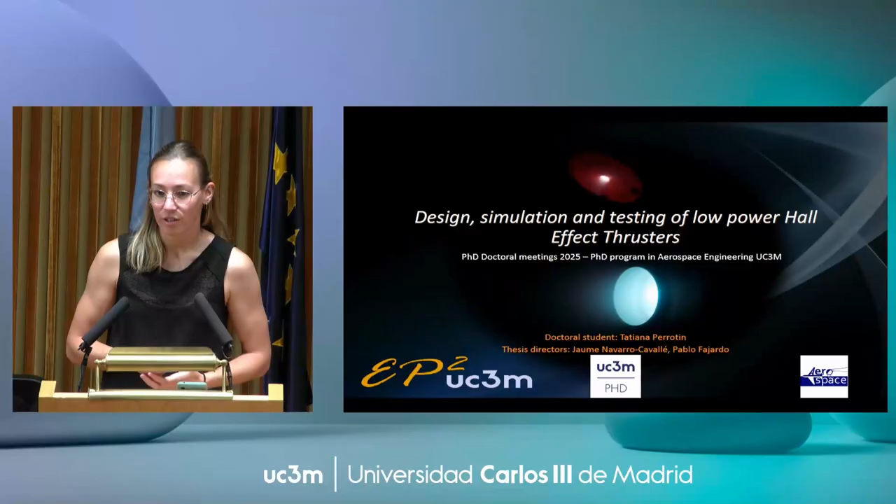I'm Tatiana Perrotin, and I'm going to talk about my work on the design, simulation, and testing of low-power cylindrical Hall thrusters in the plasma propulsion group.

For those who don't know, annular Hall thrusters are the traditional type of Hall thrusters, and they are one of the most mature and common in space electropropulsion technologies. They are pretty popular for their high performance, specifically their high thrust. But most of the existing ones are high power or medium power ones. And now with small satellites being more and more used, we need to develop low power propulsion solutions.

And this is challenging because we don't know scaling laws, and efficiencies drop as we decrease the size and the power of the thruster, along with other engineering problems that arise. And the cylindrical Hall thruster is a rather good candidate for low power because we remove the internal pole, so we remove opportunities for wall losses. Some other aspects are also a bit easier.

It's not conventional, and there are a few prototypes that exist. So there is room for research on those kinds of thrusters, and we need experimental data to improve our capability to model those thrusters and to optimize them, and better understand the physics, of course.

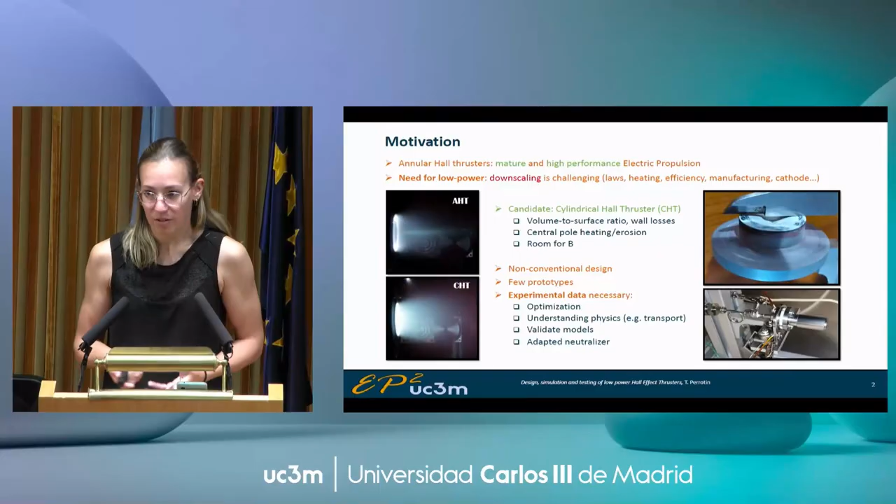So the main objectives of my thesis are centered around optimizing the performance of the cylindrical Hall thruster at low power. For this, I designed two prototypes and made them sort of modular to be able to test different magnetic fields or injectors, these kinds of things. And I characterized their performance and their plasma properties.

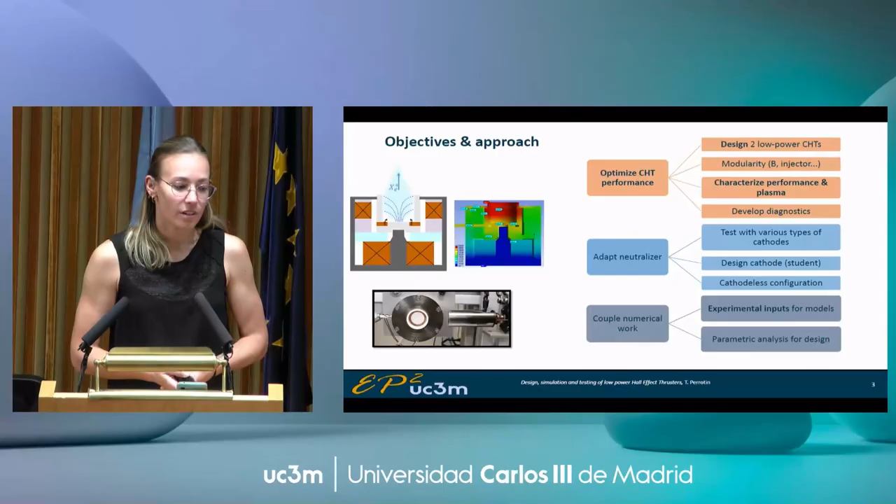Some work also focused on the neutralizer, the electron source that goes with the thruster, and on coupling numerical work, specifically providing experimental inputs for simulations. At the beginning of my PhD, I did some simulations with the hybrid code of the group, HYPHEN. And more recently, I've provided a set of experimental data for Iñaki, who presented his thesis yesterday, to run new experimentally informed simulations with this code.

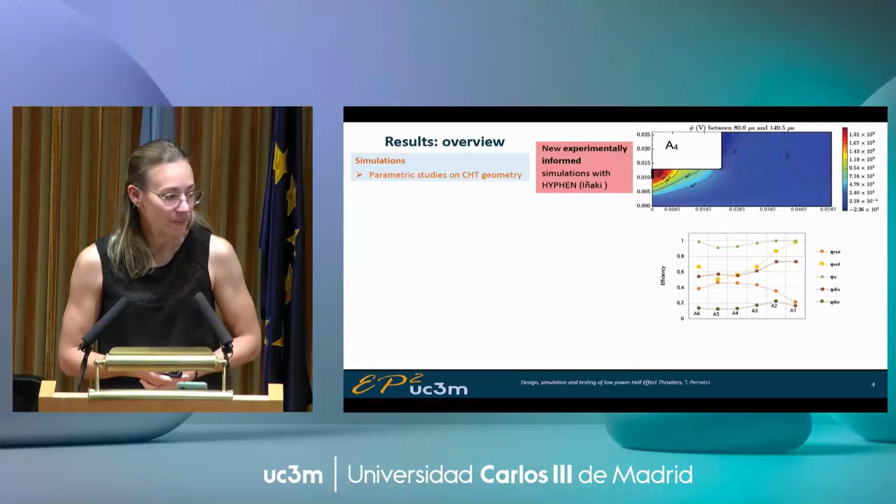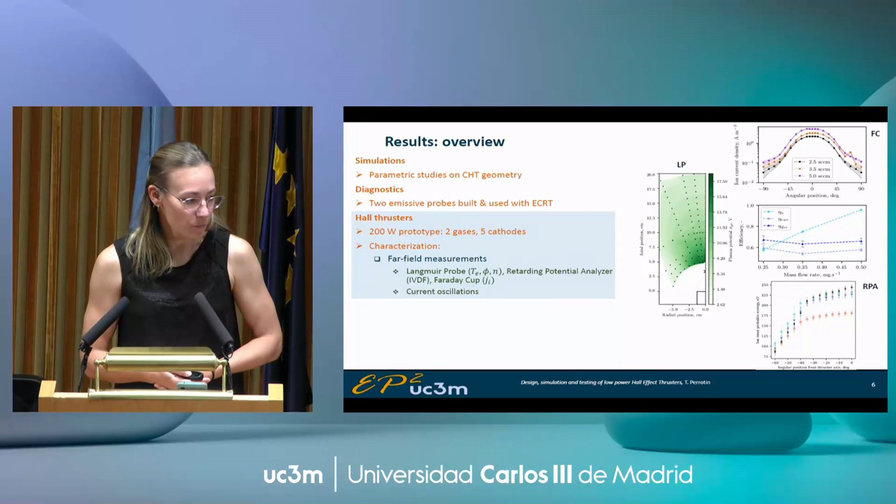In the second campaign, I looked instead inside of the discharge channel with laser-induced fluorescence spectroscopy to measure the ion and atom velocity distribution in the channel, which is something very useful both to understand the geometry of the plasma inside of the thruster and to inform models.

And the latest test campaigns I have done were focused on measuring directly the performance of the thruster using a thrust balance that we have here in the lab, and that you can see in the two pictures above, and to complement those direct measurements with probe measurements.

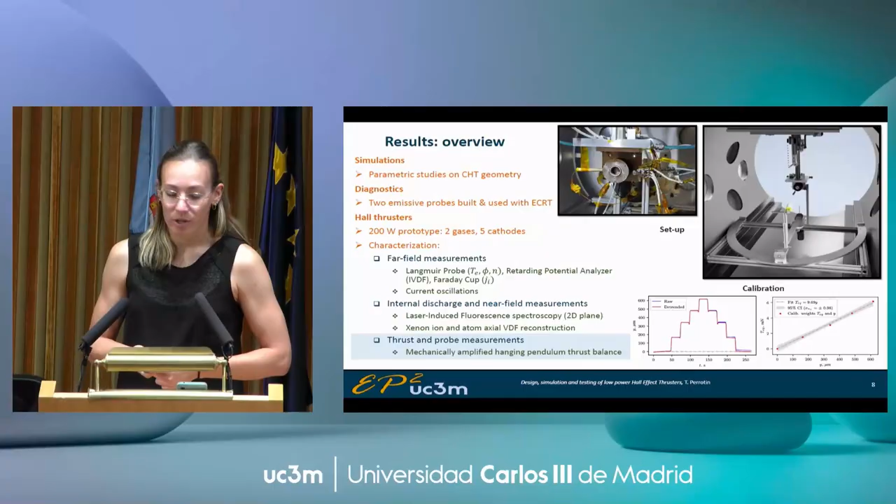So the main takeaways from those two campaigns gathered in one are that, first, we had to develop a specific procedure to measure the thrust, to isolate the real thrust from the actual displacement on the thrust balance and other external effects, which is not necessarily easy with this type of thruster.

We observed, as you can see on the top right plot, the expected behavior that the thrust increases with the mass flow rate and the discharge voltage in the envelope that we could cover. And we saw that the thrust efficiency mostly depends on the discharge voltage, that is on the bottom plot. And we reached the maximum for 325 watts, which is a bit more than the expected nominal power for the thruster. And the thrust efficiency saturates in the range of power that we covered.

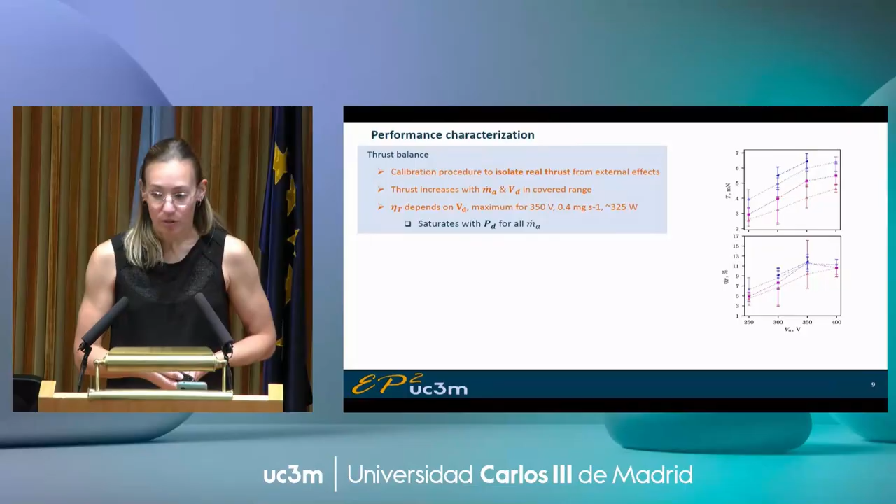As I said, to complement the thrust measurements, we did some probe measurements that give a bit more detail on the sources of losses in this thruster. So the first probe that we used was a Faraday cup that measures the ion current density in the plume. You can see a matrix of various operating conditions, so mass flow rate and voltage. And for each of these points, we did several angular scans of the plume.

And we see quite obviously on those plots that there is some asymmetry in the plume that can be caused by the cathode location, the injector inhomogeneities, the position of the coils, and some misalignments of the probe. So we have a rather clear idea of why we have these asymmetries.

And from those measurements, we saw mostly that we have a propellant utilization that is large, in some cases larger than 1, which is something typically observed in this kind of thruster, which is possible in the way it's computed in this case, and is characteristic of the possible presence of multiply charged ions. And we also observed that the divergence and the current utilization are quite low, and they're strongly affected by the discharge voltage.

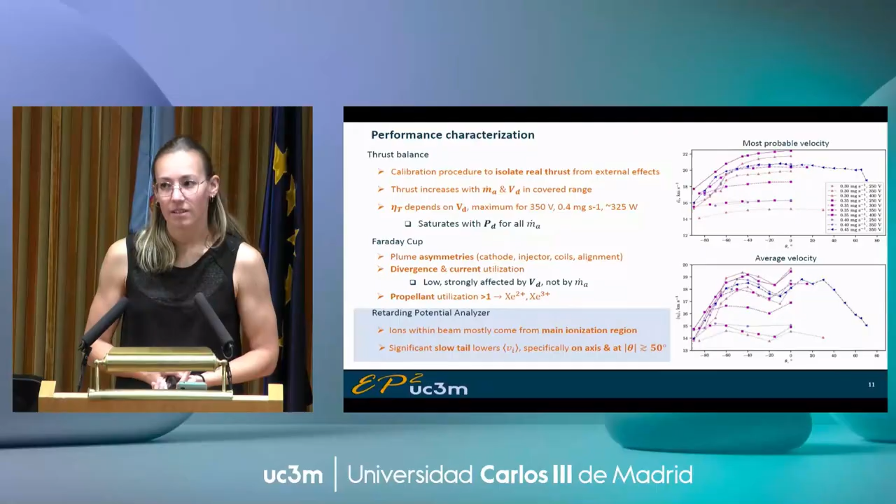Mostly we saw from the top plot that the ions within the beam come from a single main ionization region, with the sharp drop at wide angle. And from the bottom plot, we can see that on the axis and at wide angles, the slower ions that form the tail of the VDF significantly lower the average and affect the performance.

Combining the data from those two probes, we can evaluate indirectly the performance of the thruster, and we saw that there is quite good agreement with the direct measurements, which confirms that despite all the assumptions and the measurement errors, we can still rely on the information provided by the probes.

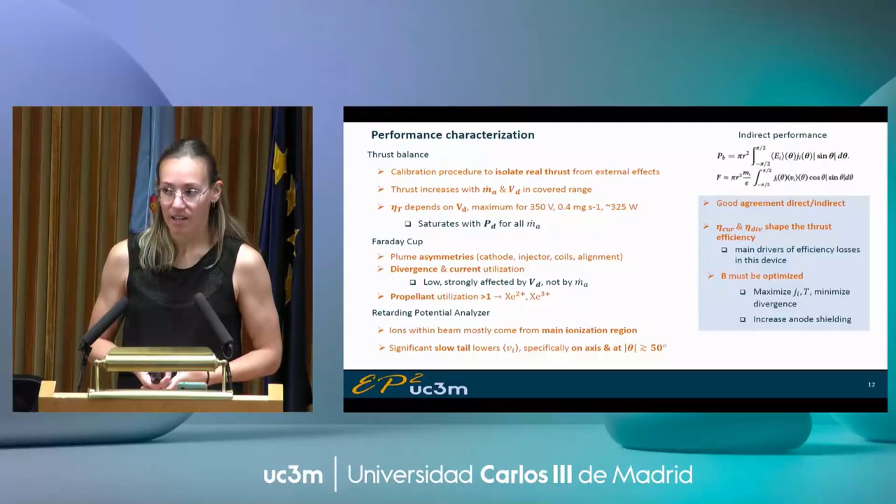As a conclusion of this campaign, we saw that the current utilization and the divergence are the main drivers for the losses in this device and are the ones that shape the evolution of the thrust efficiency. And they allow us to identify what must be optimized in the thruster, which is the magnetic topology. The objective for future iterations would be to increase the anode shielding, to have less electron current towards the anode, and maximize the ion current in the beam and the thrust.

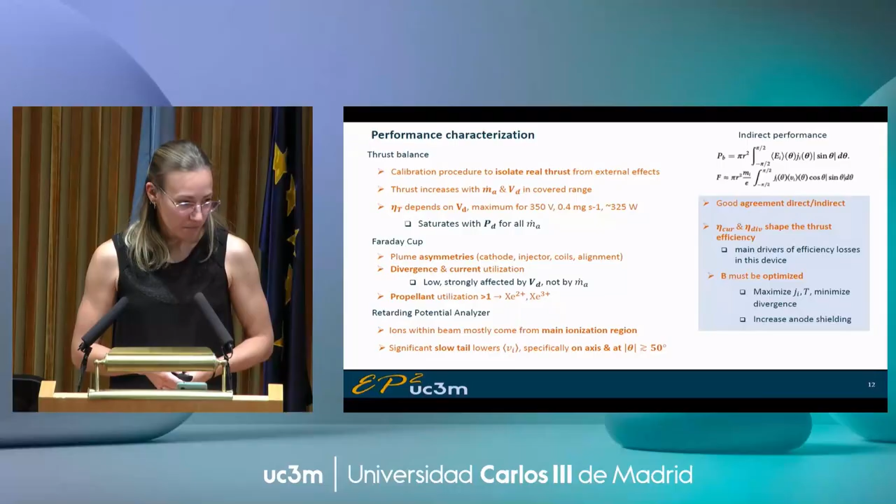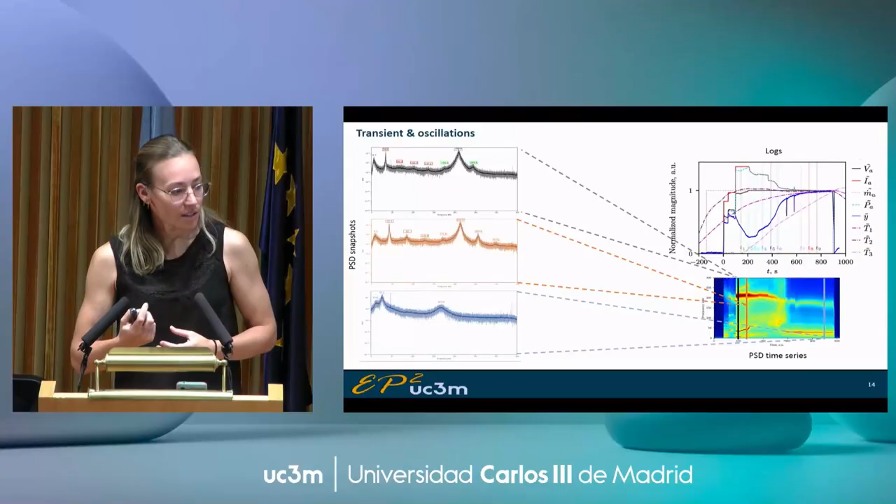This shows the evolution, as I said, of the high current. So on the top plot, you can see the high current mode with a very strong high frequency oscillation that then shifts towards a lower current mode in steady state with lower frequency oscillation.

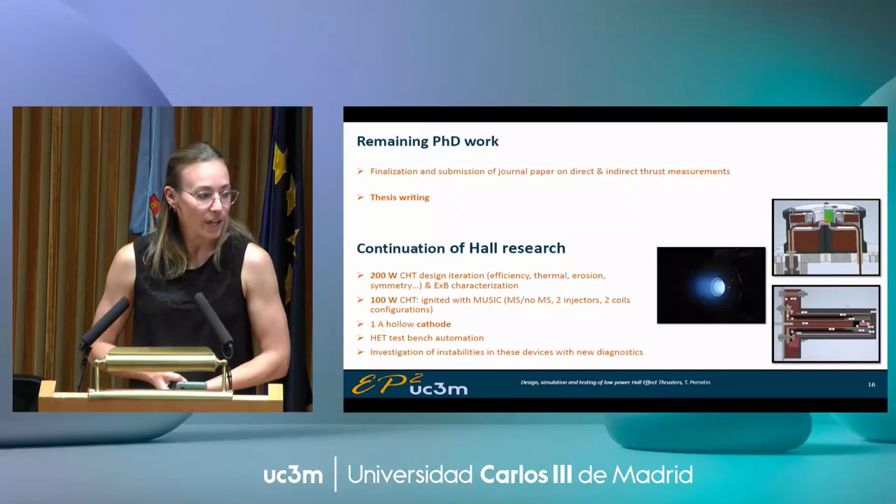To conclude, what I have left to do in my PhD is to conclude a journal paper that I am writing right now and to write the thesis. A potential continuation for the research on Hall thrusters in our lab would be iteration of the design of the thruster I tested, whose results are presented today, further testing the new 100-watt thruster that we ignited recently, developing our hollow cathode, and work on the test bench and investigation of instability in Hall thrusters.